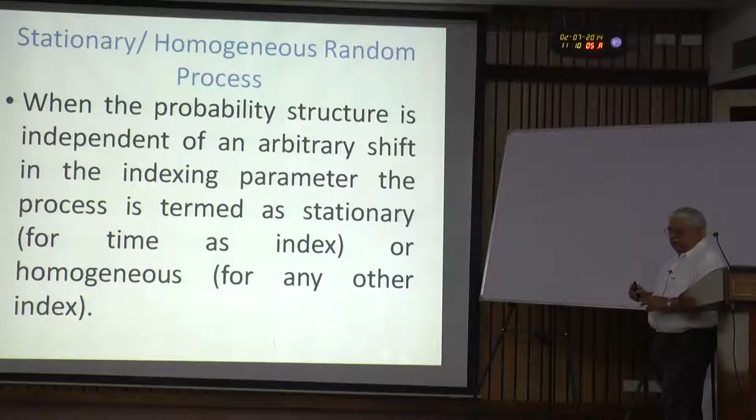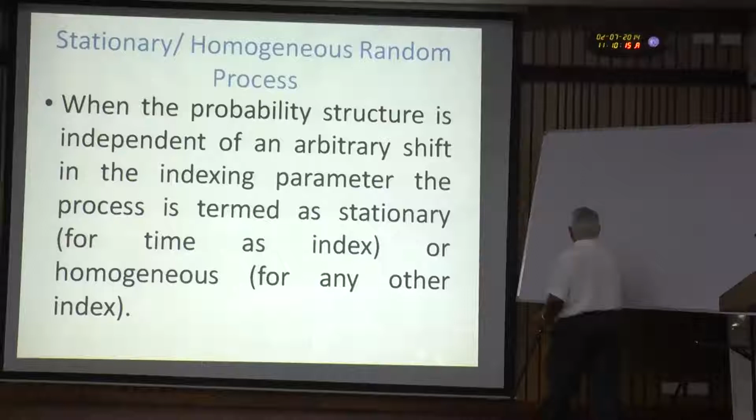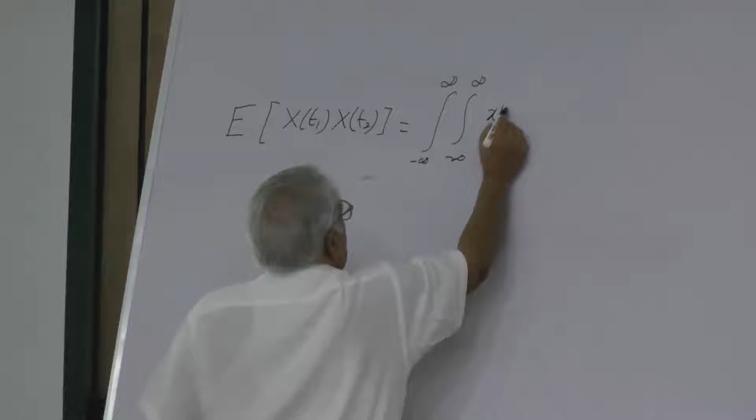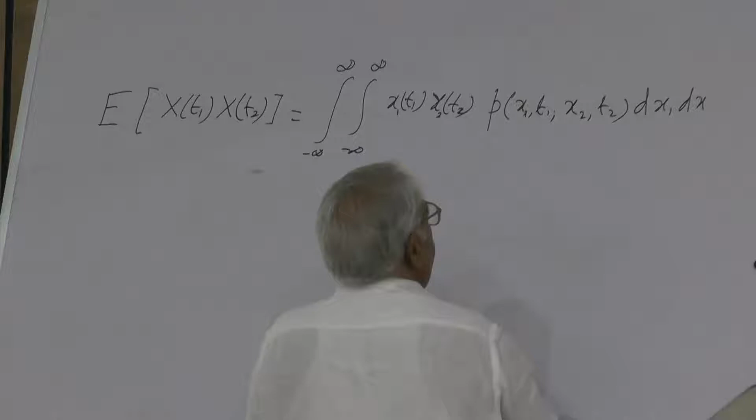I hope it is understood. I will try to explain it further. What we have here, the second moment, the expectation of x at T1 into x at T2. I am not considering the central one. This is defined as a double integral, in general, from minus infinity to plus infinity for both, and then it is x at T1 into small x at T2 into the joint probability density function of x1, T1, x2, T2, dx1 dx2. Okay. This is the general definition.

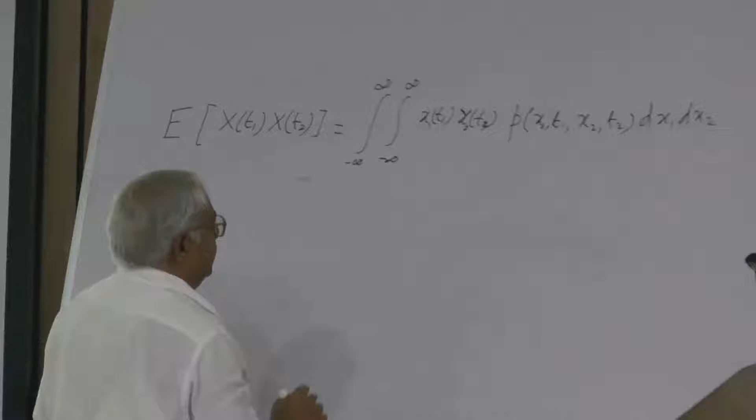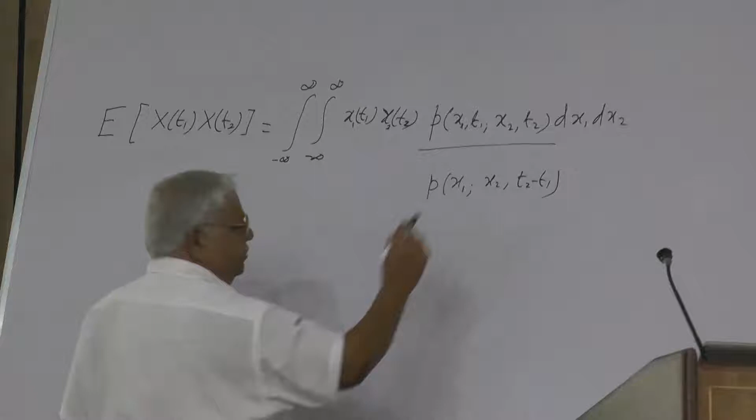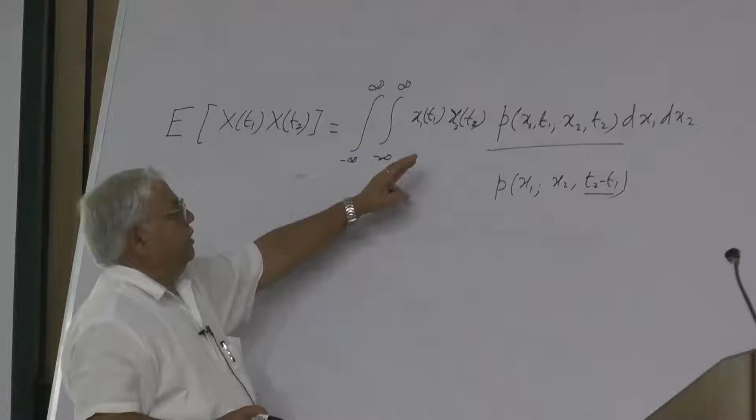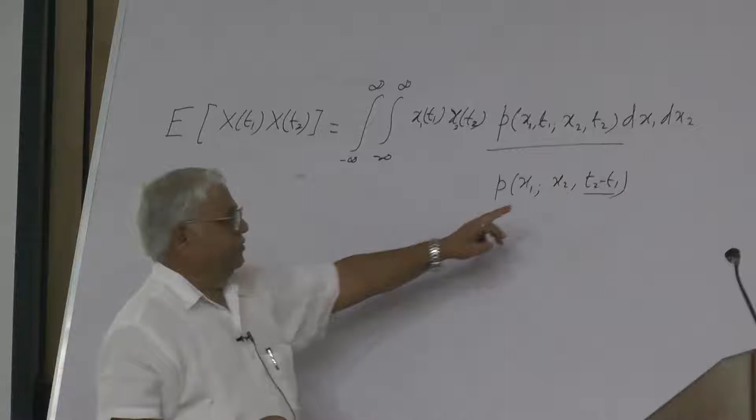This holds for the non-stationary process. But if the process is stationary, in that case this part becomes x1, 0 we need not write, x2, T2 minus T1. So, this is for the stationary process. So, when you integrate this, the second moment for the non-stationary process is a function of T1 and T2 both. For the stationary process, it is a function of this difference only. x1 and x2 are integrated out. When you substitute the limits, x1 and x2 do not come out of the integral. It is only the time part that comes out of the integral. And so, for the stationary process, this expectation is a function of the time difference. So, this difference is there between the stationary process and the non-stationary process. This makes the mathematics slightly simpler.

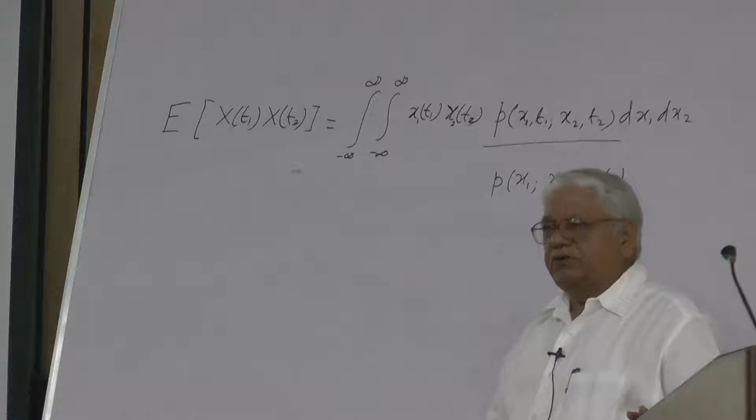So, most of the times when you make the first model for any random process in analysis, we start with this as a stationary process. And then while we examine, if we find that it is not stationary, then we go over to the non-homogeneous or non-stationary process. So, as I said, the property introduces some simplification. Now, in all vibration problems, the frequency is very important. So, we talk of the spectral properties, which are the frequency properties of the process. For this, we define a spectral density function. For the non-homogeneous process, we call this the generalized power spectral density function.

This term has come from electrical engineering. They were the ones who first defined it. So, for this power spectral density function, there is a proper theory of how it is defined and why it is like this, but we do not have time to discuss it here. This phi xx subscript omega 1 omega 2 indicates that it is the density function of the random process x. There are two of these, so this is a bivariate definition. And this hat indicates the difference between the generalized power spectral density function and what we call the PSD function here, short form, or the simple PSD function.

So, this is defined as a function of two frequency arguments, omega 1 and omega 2, as the double Fourier transform of the covariance function of x. This is the covariance function. Remember that this is a central moment. Okay. And then this has the argument, there is an i missing here, e to the power i times omega 2 T2 minus omega 1 T1. This i is missing in the typing, and integrated over time.

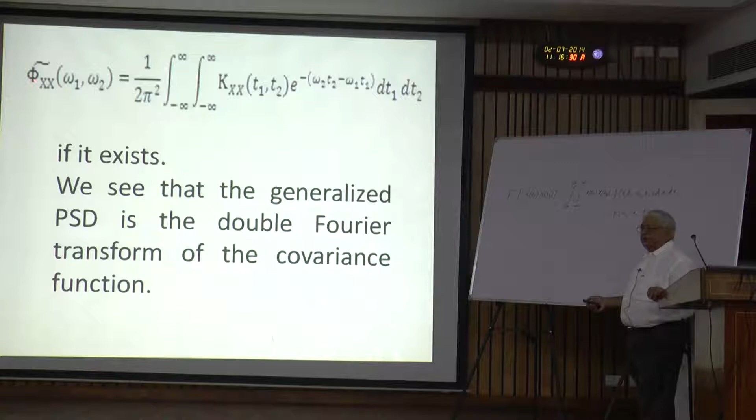Of course, this definition is valid only when this integral is bounded. For many problems, this integral may not be bounded. So, you may have the covariance function, but you may not have the PSD function. So, this is the generalized power spectral density function, and the information is equivalent. If you know the covariance function, we can find the PSD expecting that it is bounded. If the PSD is known, by taking the inverse Fourier transform, we can find the covariance function.

Now, for the stationary or the homogeneous process, this definition is simplified, as there is only one time, that T2 minus T1. So, we indicate this by tau. This is the lag period or the time difference between the two x's. This we call as the lag period. And you can see that this is the single Fourier transform, that I is existing here in the other expression that I was missing. So, this is 1 by 2 pi integral minus infinity to plus infinity covariance of the stationary process x e to the power I omega tau d tau.

And by inversion, the covariance can be written in terms of the power spectral density function. This is the simple power spectral density function, no hat put here. So, many a times when we are solving a problem and for the excitation or the input, only the information up to the second moment is available, we find the response covariance either for stationary or non-stationary, and then to get the frequency breakup, we go to the power spectral density function, either the generalized one or the simple one.

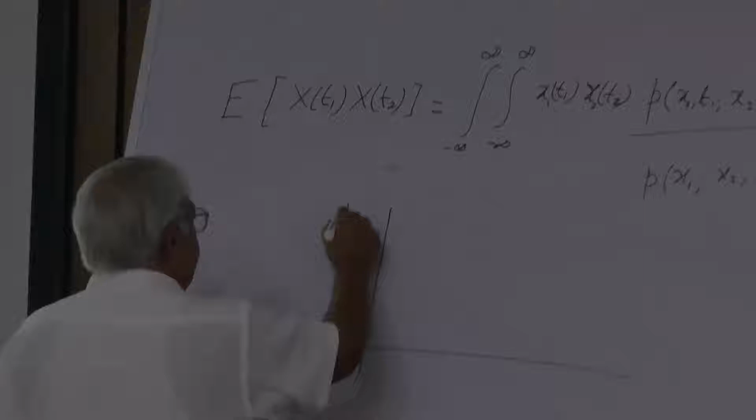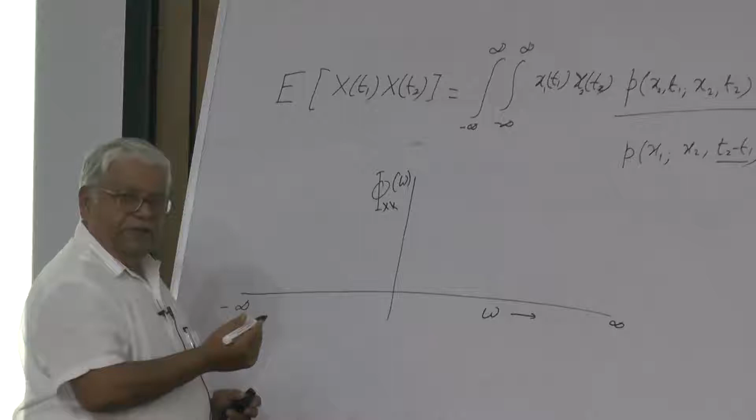We are plotting over omega here from minus infinity to plus infinity. Actually, negative frequency has no meaning physically. Frequency is always positive, but we still consider this as negative mathematically. And if the PSD function is flat like this, say phi naught, a constant value, this is known as a white noise. Mathematically, it is simple to handle. It is constant, not a function of omega, so integration and differentiation are easy.

There are other types of standard processes classified according to the power spectral density function. Like this is something very common. This constant white noise process is not a real process. Actually, this line that I had drawn, it can be shown that the area below this, between the x axis and this line, indicates the energy content in the system.

As I said, there is an argument why we have this definition of the PSD function. So, this indicates the energy content of the system, and a white noise starting from minus infinity to plus infinity will have infinite energy. So, theoretically it is easy to handle, but practically it is not a real process. There are many real processes like this. It would start at some omega naught and finish at some value symmetrically. This is known as a bounded white noise.

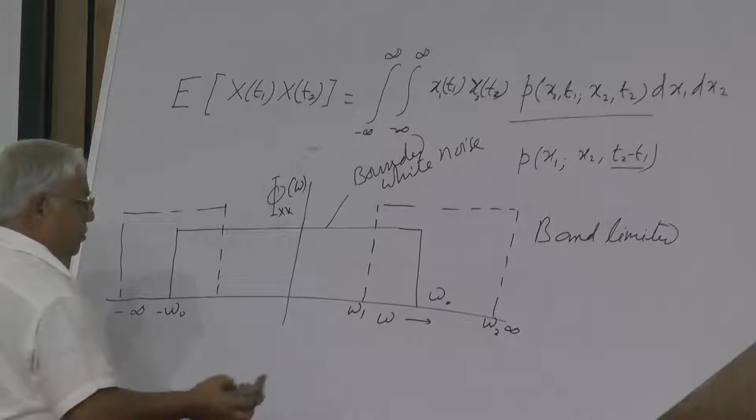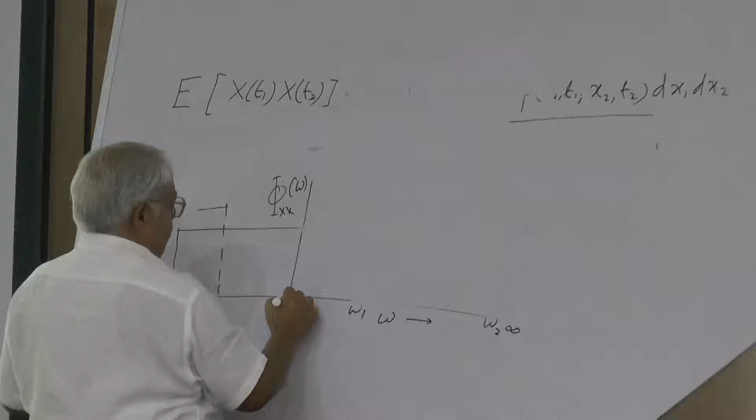I will give you one example of a real power spectral density function. The unevenness of the track, the landing track, the airstrip or the road has a form like this. It does not start from 0, somewhere here. It goes like this. This is a type of PSD function that we have for a road.

Zero frequency — this frequency now is not the time frequency. When you are using the road, it is spatial frequency, radians per unit meter or per feet in terms of space, not in terms of time. Normally, frequency we say is radian per second, but spatial frequency would be in terms of the distance. So, it goes like this. Here,

zero frequency means what? If you have a system with zero frequency, it means there is no oscillation, it is perfectly flat. In terms of the road or the track, it is perfectly flat. And what this indicates is, suppose we have the road here, this is the mean level and this is the road to some exaggerated sense. It may not have a flat mean, it may have a variable mean, it may have undulations like this in the mean. Over that you have the unevenness scattered. So, all those things are possible.

So, basically zero frequency does not exist on the road. So, it is 0 here, and again to simplify the problem for analysis, we make it like this. We will let it extend and cut somewhere here, and this is the type of profile it has. We can say that as far as the analysis of a vehicle running on the road and its vibration is concerned, if the frequency is in this band, then it is important. If the vehicle frequency is beyond this band, then the road unevenness will not affect it. It will affect only in this range. Beyond this range, there is no interest, the oscillations would not be coming into picture.

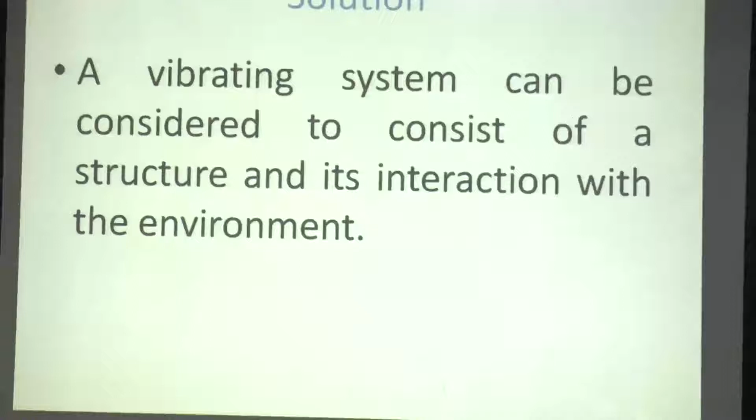This was just some idea about how we can characterize and understand the behavior of a random process looking at its PSD function. Now, after talking about the random variable, random process and its description, I wanted to show how we can use this for some problem solution. So, there are two approaches used here. This is about the modeling of the system. Basically, there are two components in the vibrating system, the structure and the environment with which it interacts.

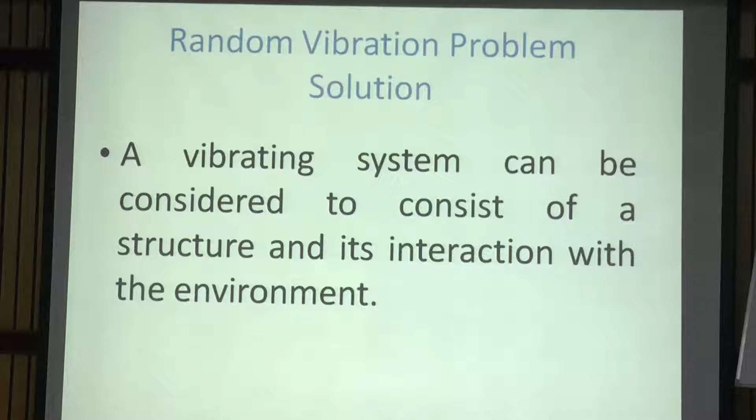So, we model the structure depending on the need, the type of analysis that we want. This is not only for random vibration problems, this is for all vibration problems. We model it either as a discrete set of masses, so you have the discrete or lumped mass systems, 1 mass, 2 masses, 3 masses, 4 masses, like that. We can continue to increase the masses, or we can model it as a continuous system, depending on what is our interest. If you are only interested in the behavior of some point, how much deflection comes at that point, how much stress gets developed at some critical point in the problem, then we can model this as a lumped mass. If you are interested in the complete global behavior, then we model it as a continuous system.

So, we model the structure and we model the environment, both of these. The structure we model to have a mass, some stiffness linking the different masses, or even for the continuous structure, and to have some damping property, dissipative property. Stiffness and damping can be linear or nonlinear. The environment interaction gives us the excitation to the system. So, again, depending on the model that we have made, if there is a single mass, there is excitation at that particular mass only. If there is more than one mass, then all of the masses may be excited, or some masses may be excited and others may not.

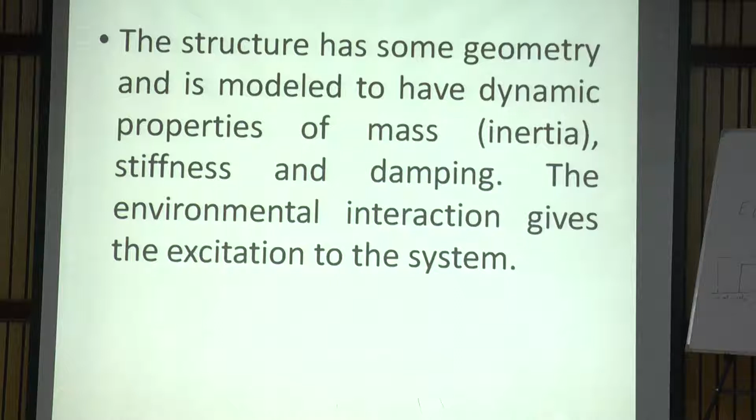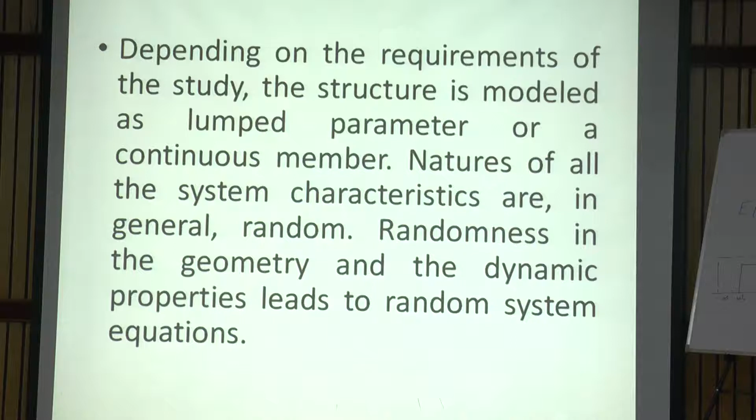In general, all these parameters that we are looking at, the mass, the stiffness, the damping and the excitation, are random in nature. They cannot be defined completely with deterministic quantities. So, if you want a very accurate study, you define all of these as random, and we expect that the characteristics in the probabilistic sense are available to us, either the density function or in some cases the moments. Normal real structures are very complex, so we simplify the model to have an easy mathematical analysis.

Usually, if you have the system also random, that is the mass, stiffness and damping also random, then the system equation is a random equation. If you ignore the randomness in the system, which we cannot do in all cases, as a start, we would like to consider the system to be not random initially. So, we will say that the mass, stiffness, damping are completely deterministic, given to us with full information. So, the first study is started with the excitation as random. This is the simplest one to solve.

So, here I have taken one example of a single degree of freedom system, with mass, damping and stiffness. As I had mentioned earlier, normally when we consider something to be random, we use a capital letter, and if it is deterministic, we use a small letter. So, I have used capital X here to indicate that the response is random. The excitation is considered as random. In this particular example, M, C and K are not considered as random. To a long distance, the solution approach is the same; we will see as we proceed further. It is only later on that the solution approach changes.

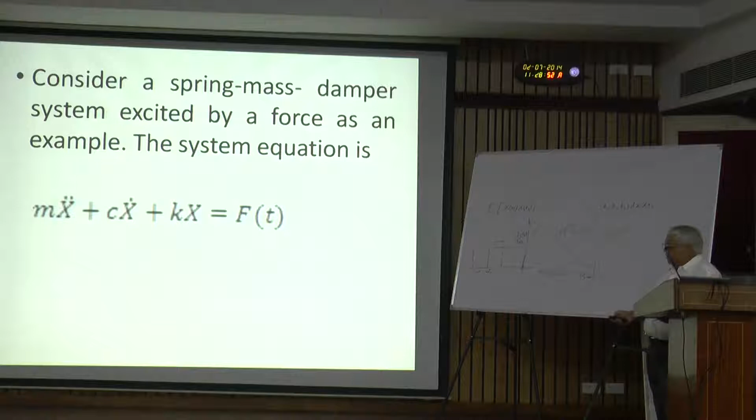So, in this example, we are considering F to be random. As F is random, the response is dependent on F. So, if F is random, X is also random. It has to be. That's why it is made as capital here. So now there are two solution approaches. I am describing here the first one.

Here only f(t) is assumed to be random. The system equation can be expressed. This is another way of writing a single degree of freedom system; it can be done for higher order systems also. The whole equation is divided by m, the mass. So we can say that we have a system with unit mass, or whatever mass it has, in our measurement we take that as unit.

Okay. So this 2 xi omega n is c by m. Omega n square is k by m. This omega n square you know. This is the natural frequency of the undamped system. The same omega n comes here, and this xi is known as the damping ratio, or sometimes the damping factor. Okay. So c by m can be shown to be 2 xi omega n.

I am not doing it. I expected that Professor Wahi will do it.

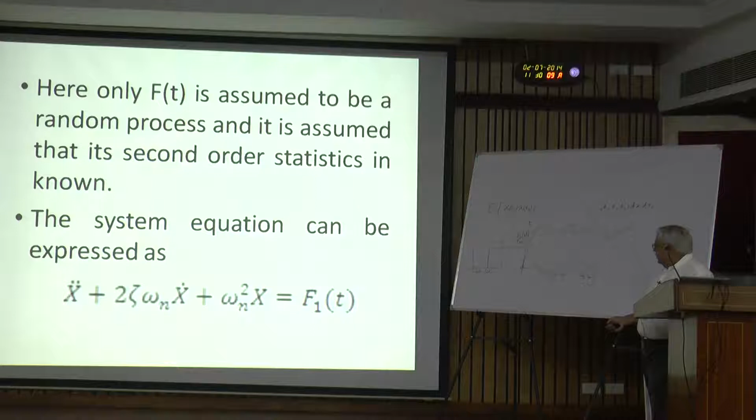Anyway, so this is another form. Here this f1 is f divided by m. I have indicated here, omega n square is k by m. This xi is c by cc, where cc is the critical damping, and f1 is f by m. The general solution can be put in two parts: the complementary function part and the particular integral part.

Remember, yesterday when Pankaj was talking about this, he had put the form like this: e to the power minus xi omega n t multiplied by a sin omega d t plus b cos omega d t. So this a and b we can break up. You remember that form. There were two constants involved. Here also there are two constants involved, A and phi, so that a and b can be expressed in terms of A and phi. So this is a more compact form, easier to handle. Also you can perceive what is happening here.

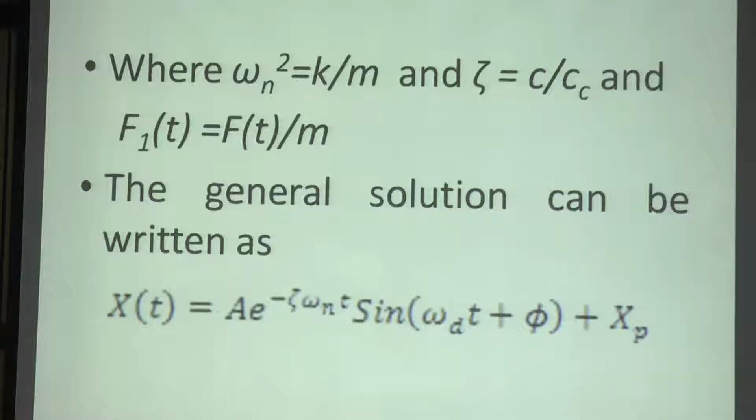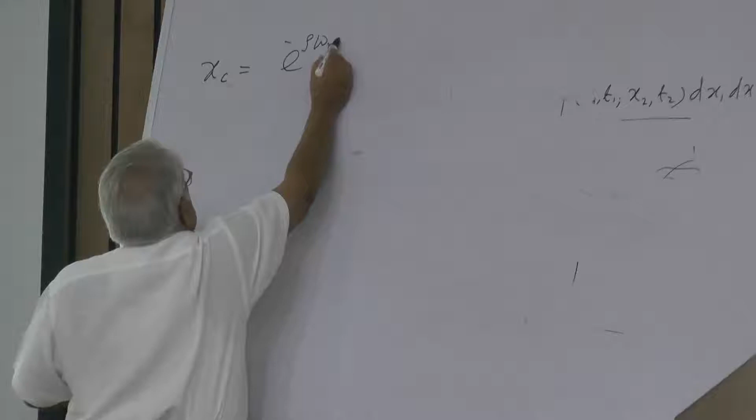Should I do the breakup? Okay, let me do the breakup. Where you had left yesterday was something like this. The complementary function x_c is e to the power minus xi omega n t multiplied by a sin omega d t plus b cos omega d t. He didn't use xi, he had omega d here. Here I have used A there also, so I will use something else.

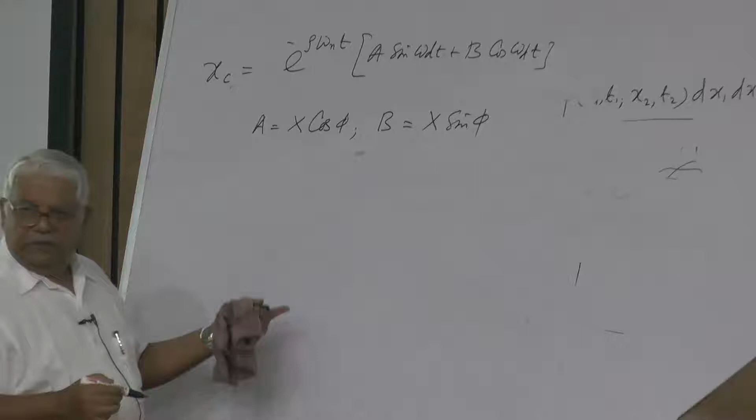What we do is, we write this a as, say, X cos phi and b as X sin phi. Can we do this? Yes, we can. A and b are constants, X and phi are constants. If we square and add, a square plus b square is X square. Okay. B by a is tan phi. So using those, we can relate a and b. Now if you substitute here, take X outside, what will we have? So this becomes capital X e to the power minus xi omega n t, sin omega d t cos phi plus cos omega d t sin phi. Can we write this as sin of omega d t plus phi?

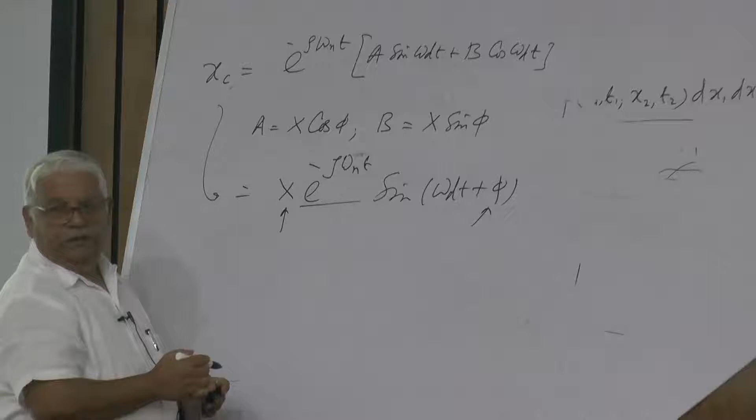So this is what I have indicated here. This is the phase angle. This X, which is written as A there, is the amplitude, and this indicates the envelope. This is how the system is decaying. Okay. This is the way the system decays. Okay, so this is the complementary function part, and then I have left this particular integral as xp.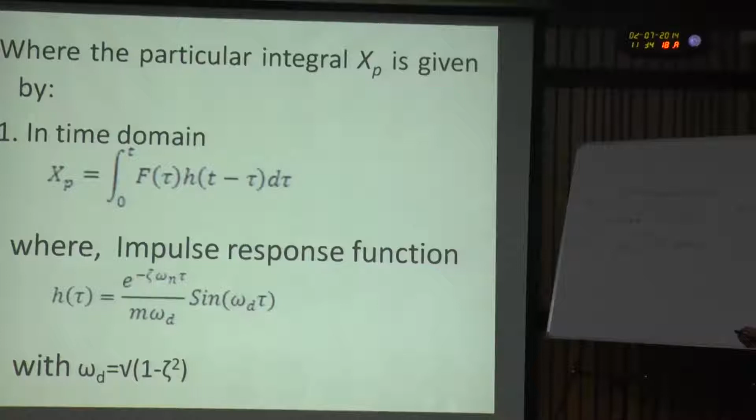The reason is there are two approaches to xp. We are considering, especially for random vibration problems, that the excitation is not going to be periodic, or it's not going to be a harmonic function. It is a general function. So, assuming that f(t) or f1(t) is general, we are using the impulse response function here. In the time domain, this h is known as the impulse response function defined here. h(tau) is e to the power minus zeta omega n tau divided by m omega d, times sin omega d tau. And this integral can be shown to give the particular integral.

Particular integral is any solution. Remember that for the linear single degree of freedom system, or linear second order constant coefficient differential equation, all you need is a solution, because the solution is unique. Whatever you get has to be the solution. The variation due to the initial conditions is taken care of by these constants here, this constant A and this constant phi. So, this is what we call the time domain approach. There is a second approach which we call the frequency domain approach. There this capital H of omega is known as the frequency response function.

And for any general type of input, this is the form that it has, and this integral gives the particular integral. This can again be shown that this will satisfy the system differential equation. So, depending on which one we are going to use, that x p that I had left there can be put there.

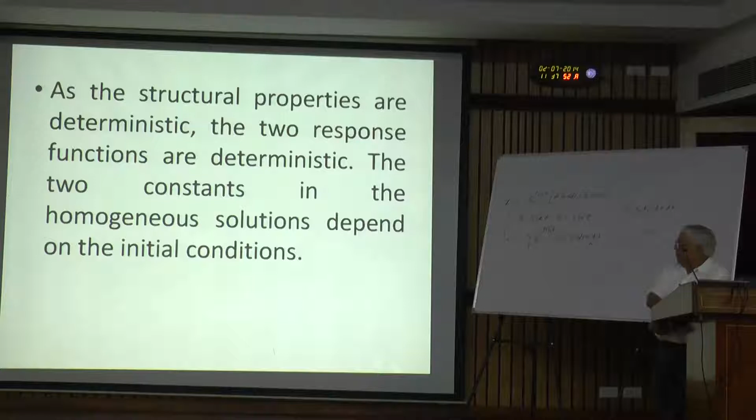For this example problem, we are assuming that A and phi are deterministic. So, we are not taking the most difficult case, the simplest case we are trying. So, in the time domain, this is the solution, the complementary function part and the particular integral. Now, we are assuming here that for this excitation, we have the knowledge of the first two moments, the mean and the correlation or the covariance is given to us.

So, we expect that the probability density function is not given. If it is given, then using this expression, we can find the probability density function of x. It is possible. It is complex, but can be done. If it is not given, then we have to make do with the moments. So, we take the moment of this x of t. So, we find the mean of x. So, that is the expectation of x of t.

Remember that this expectation is an operator, and when you take it over the deterministic quantity, it remains as it is. The probability density of a deterministic quantity is 1. Okay, it does not change. So, this part we are assuming as deterministic, it will stay as it is. If we had considered the initial conditions as random, then we need some information about A and phi, and then we would write an expression like this here. Okay. So, this remains as it is.

Now, the second part here, this expectation is taken before the integral sign. Now, knowing that the expectation and integration are both linear operators, we interchange the order. So, we take this integral outside and take the expectation inside. Here, this part is deterministic as it contains the system parameters. This one is random. So, only the mean of this is taken, which is written as mu of f tau. Okay. Mu of f tau h t minus tau d tau.

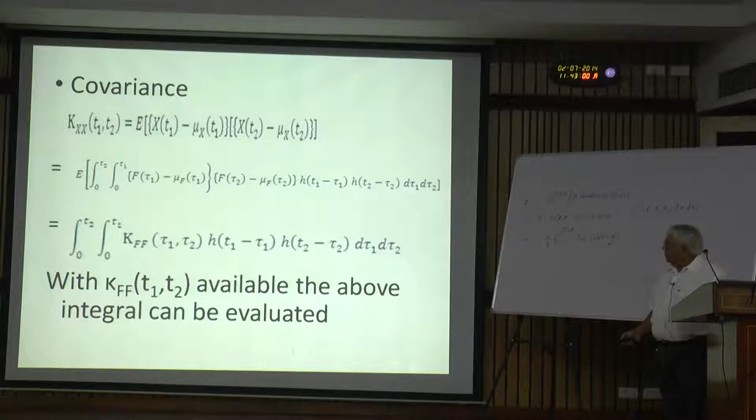Again, when this expression is known, we can do the integration. If it is difficult, then we do it numerically. Otherwise, we do it in the closed form. So, this is the time domain approach. We do exactly the same thing in the frequency domain approach. Only difference is that this part of the integral is in the frequency. Here it is not integrated over time, but integrated over frequency. So, exactly the same thing. This one has to be replaced.

By the way, this f1 bar indicates the Fourier transform of f1. So, first that has to be obtained. Normally what would be given is the mean of f1 or the covariance of f1. So, from the mean and covariance of f1, we have to find the mean and the covariance of f1 bar. Okay. So, this is the expression for the frequency domain in the mean, and this is the one in the second moment, the covariance.

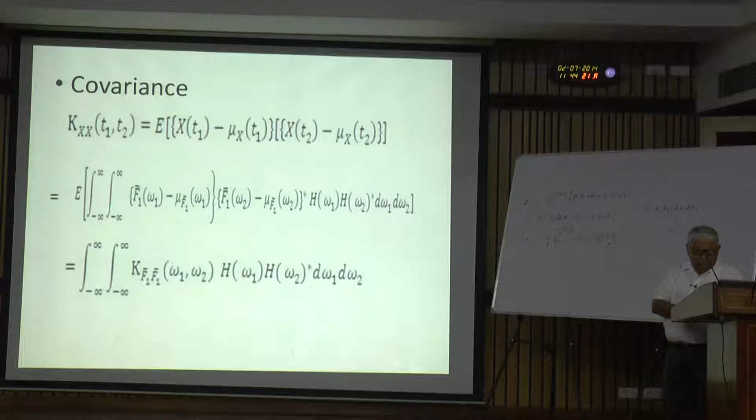Exactly the way we had done earlier, writing this term, then taking the expectation inside. So, this becomes the covariance of F1 bar at omega 1 and omega 2. Okay. So, this is the first approach. The second approach is, I could not make the proper transparency for that. I will just explain from here. You see here,

in the first approach, what we did was, we solved this differential equation, found the expression for the solution of x, and then by taking the different expectations, we found the mean and the covariance of x. Now, it is possible that we take the expectation here itself. If you take the expectation here itself, so I take the expectation of this whole equation. So, what will we have?

We will have m into the expectation of x double dot, which is the mean of x double dot, c into expectation of x dot, which is the mean of x dot, and then expectation of, sorry, not k, expectation of x, which is the mean of x. So, this differential equation, which is in terms of x, x dot, x double dot, comes out as mean of x, first derivative of mean of x, second derivative of mean of x. Can you see that?

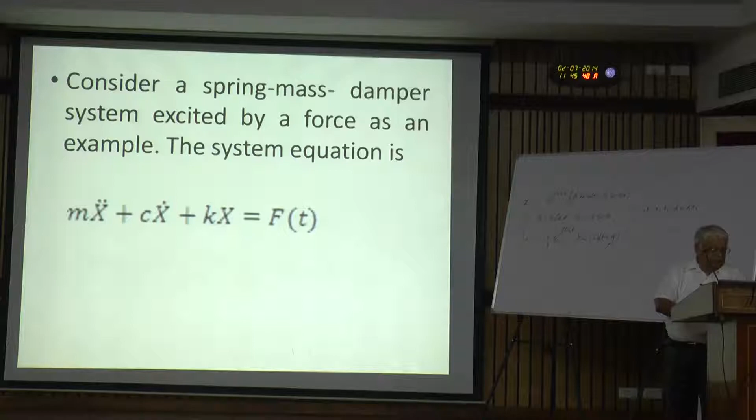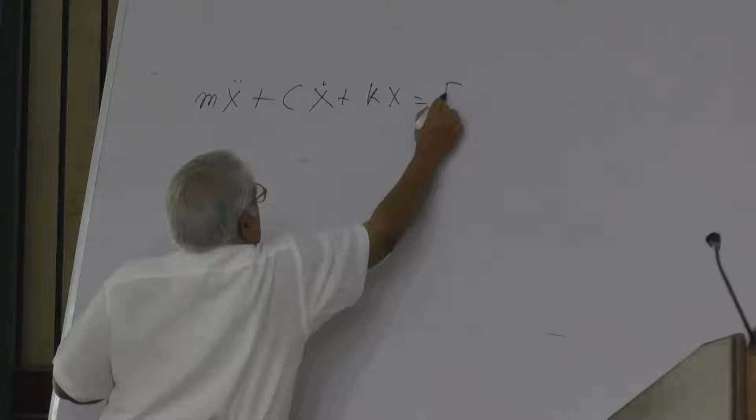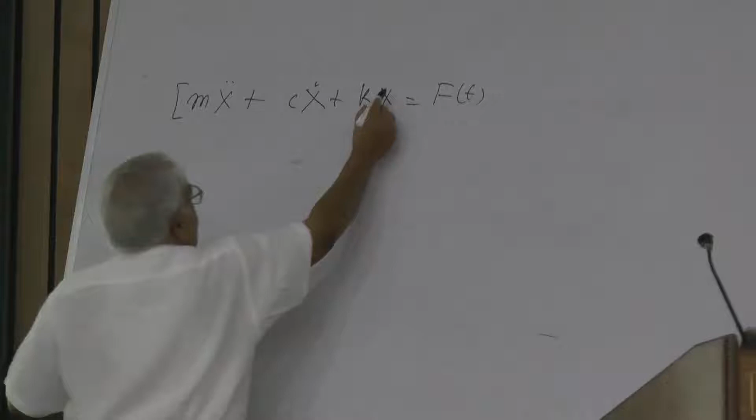Let me write this. We have the equation like this: m x double dot plus c, this is small c, x dot plus k into x equal to f of t. We are assuming that these are deterministic. So, what I do is, I take the expectation of the whole thing. So, term by term we consider here. So, this m is deterministic. So, first term becomes m into expectation of, and I am writing this as the second derivative of x with respect to t

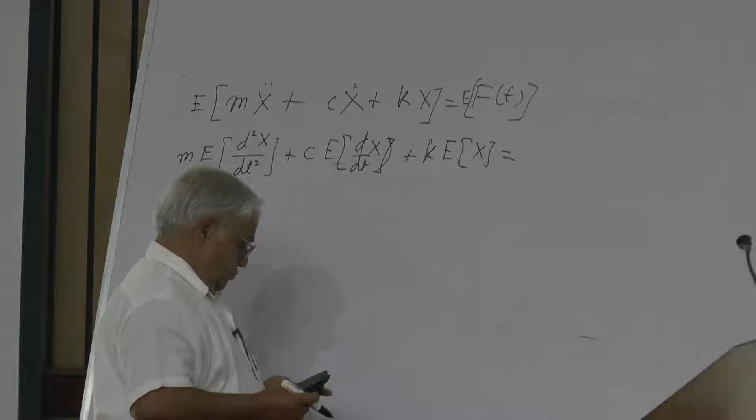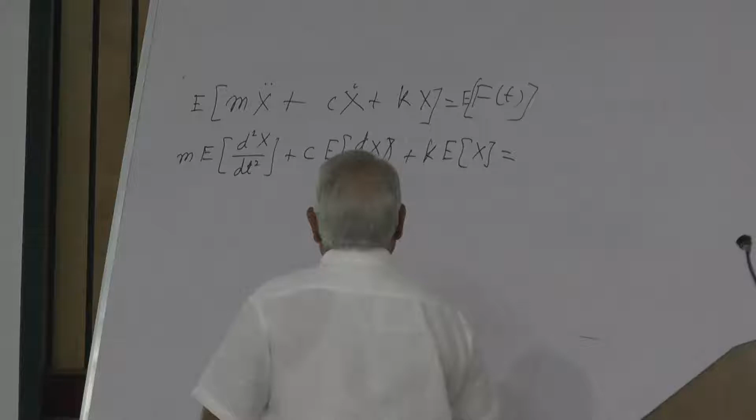plus c expectation of x, okay, plus k expectation of x. Sorry. Okay, so, and this part here. Now, what about this? Can I write this as mu f of t, the mean of f, and this side here, this becomes plus k mu of x.

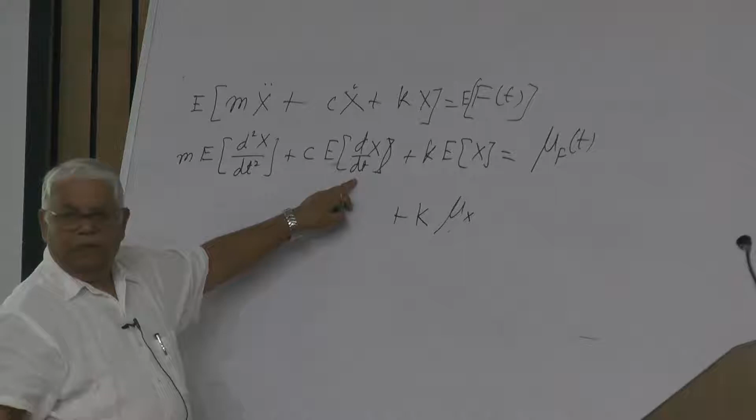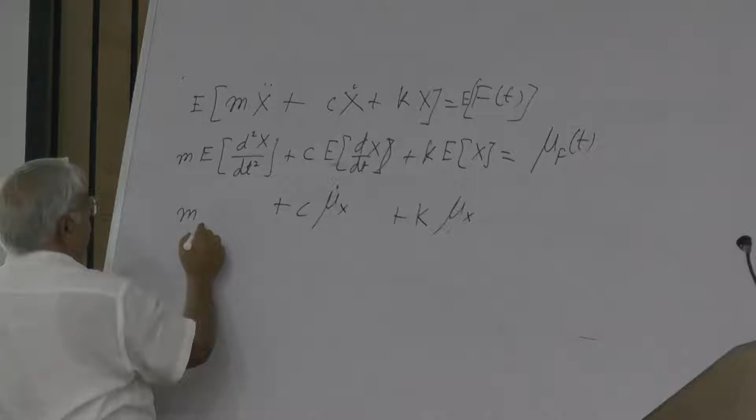Differentiation is a linear operator, expectation is a linear operator, you can interchange the order. So, when you take it inside, it becomes mu of x, and derivative of that is c multiplied by mu of x dot, or, depends how you want to write this, mu dot of x, plus m, same process again, mu x double dot. Okay. So, now instead of this differential equation, we have the differential equation in the mean of x, and this side you have mu of f.

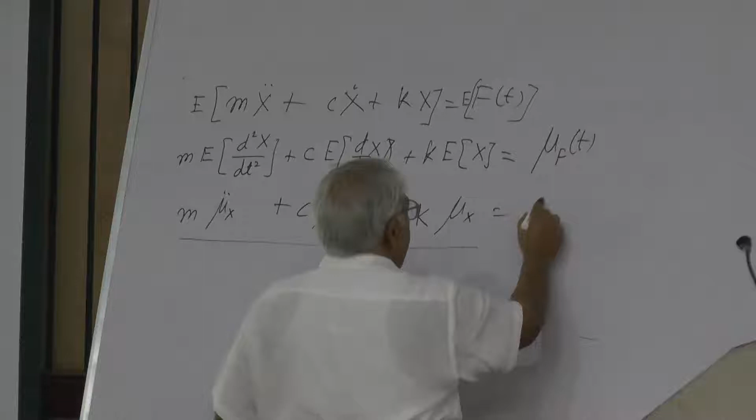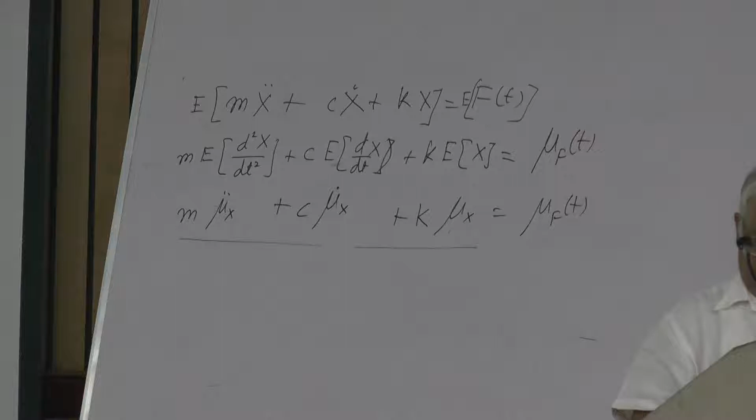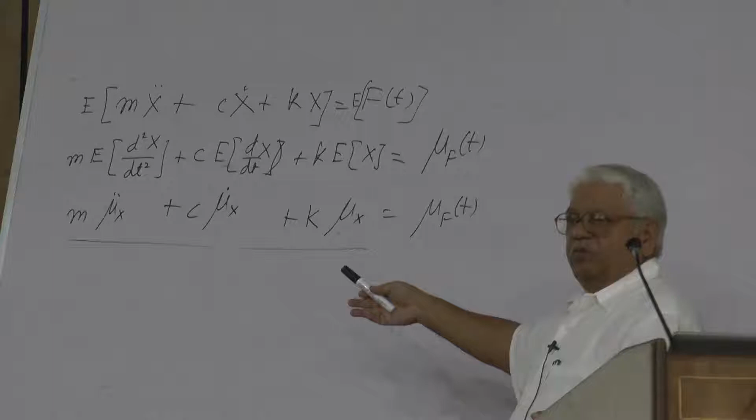So, this is the second approach. Rather than first finding the response, then taking its expectations, you directly solve the differential equation in the moments itself. So, just like we took the first moment, you can take the second moment and even higher ordered moments, we solve the differential equation. Solving becomes slightly difficult.

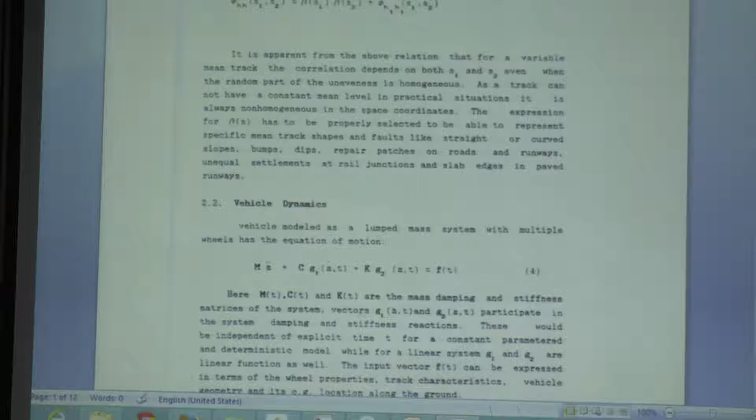The reason is, let me see if I can show that. I had used this approach for a particular example of an aircraft in the takeoff run, and it was a multi-degree freedom system, non-linear system. So, this is the differential equation. This is the system equation. It's a multi-degree freedom system.

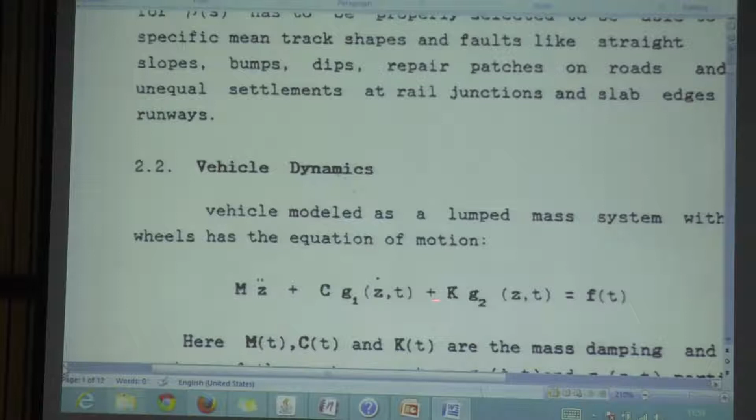So, this M is a matrix, C is a matrix, the mass matrix, the damping matrix, and the stiffness matrix. Z is the response vector. So, Z double dot. G1, a function of Z dot and T, is the non-linear part of the participation in the damping; the damping matrix is kept as linear, but there is a nonlinear function put here that gives the participation of damping. Similarly, G2 is the participation of the stiffness. Okay. So, for this I had used this approach.

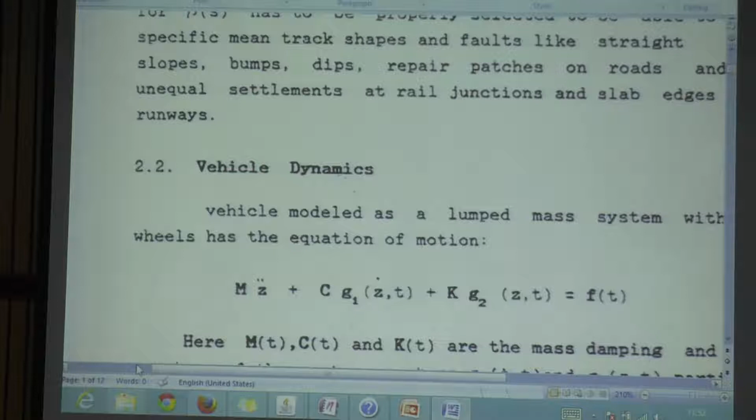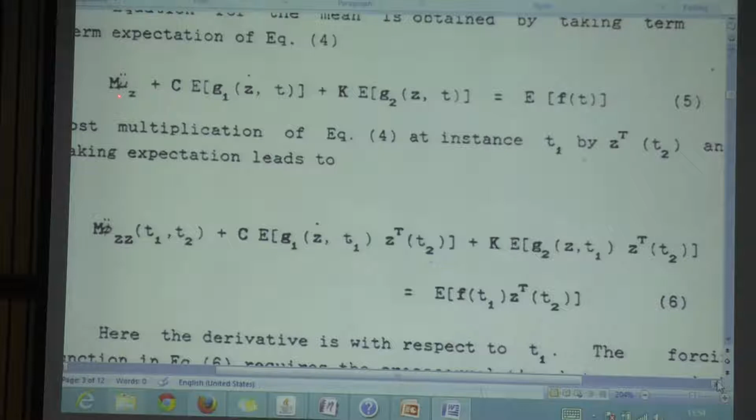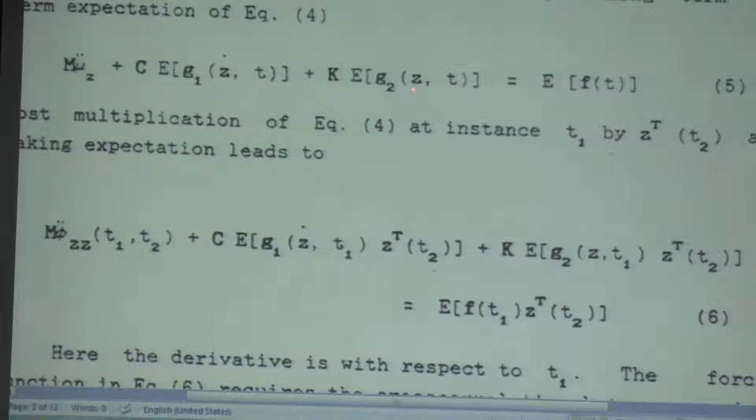I will try to show you the equation in the modified form. These are the two equations for the mean. After the expectation is taken, mu z, and this is the expectation of the nonlinear function. This is a z dot here, the expectation of the other nonlinear function due to the stiffness, and the expectation of f of t. This is for the first moment. If we know the expression of this function, then we can find this expectation.

Similarly here, this is the second moment. In this case, not the covariance, the correlation has been taken. That is, mean has not been subtracted. So, this time you get this equation for the second moment, and then with the properly known initial conditions, these equations can be solved. This being a nonlinear equation, you have to do it numerically.

Suppose it was a linear equation where this was just z dot and this was just z. In that case, we could have done it by hand also. We could have obtained the closed form solution. So, just wanted to show that this is the expression that you get for the second moment, and I will try to go to the solution.

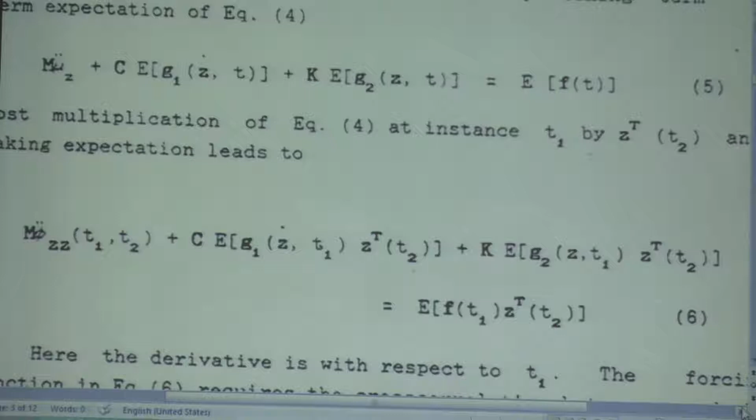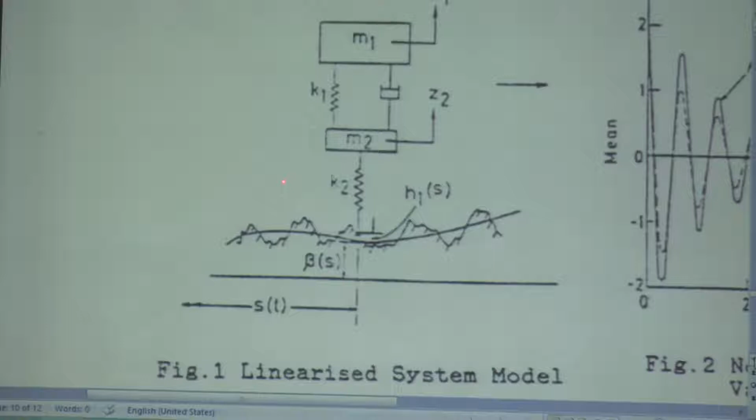The data is taken for a light passenger aircraft. This is the model. A very simple model is made. This is for the aircraft landing gear. This corresponds to the tire. The tire is given a stiffness. Tire has only air, so the damping in the tire is neglected. This M2 is the landing gear mass, the total landing gear mass, and M1 is the share of the mass that comes to that landing gear.

Usually, there are more than one landing gear for an aircraft. So, there are 3 in the tricycle type. So, depending on which one we are analyzing, this will not be the total mass, this will be the share of the mass for that landing gear, and the stiffness and damping. This is a linearized problem here. Z1 is the response of the upper mass, we call that the sprung mass. Z2 for the second mass, that is known as the unsprung mass.

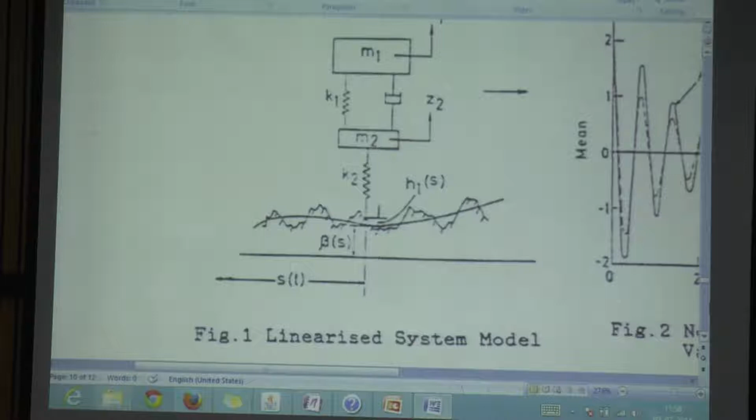Then the runway has a mean unevenness, which is not constant, it is not flat. Then a random superimposed value like this is indicated as h of s. Now, I have the solutions here. There is a slightly modified mean response. This is for the takeoff run, remember.

So, this axis is very expanded. So, when the motion starts, by the way, from the response of the first and the second mass, this mean value of the runway is subtracted, because that also comes in this value. So, actually this will give the oscillations of the masses, and this is the mean value.

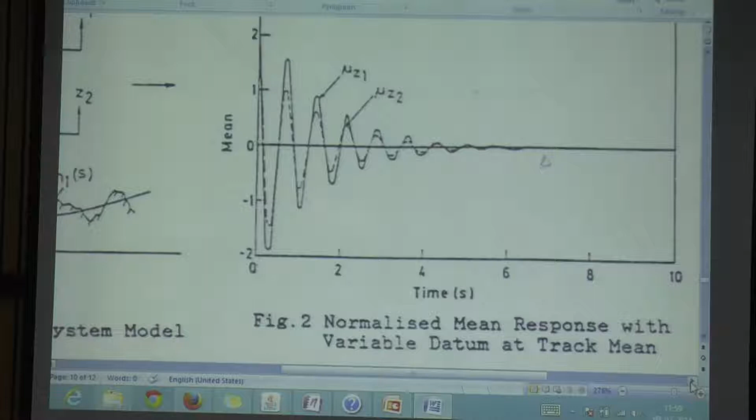When it starts with a shock, it has a large displacement, and gradually as it runs, this drops out. The reason is, as the aircraft runs, the lift increases. As the lift increases, the effective mass reduces, and finally at the takeoff time it becomes 0. So, that is why this is reducing. This is the second moment, the correlation function.

Every time the zoom is changed, it goes to the top.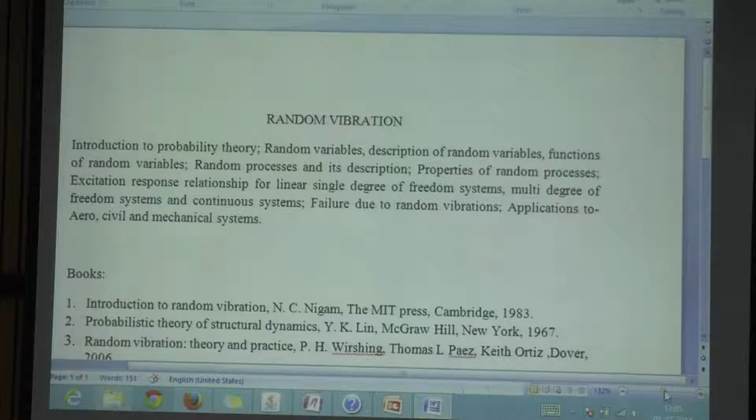There are some books that are very useful, which I have used as textbooks. Introduction to Random Vibrations by N.C. Nigam is slightly old, but it is still the best book in the market. Probabilistic Theory of Structural Dynamics is still older, but gives a lot of information. Then there are some more recent books. Random Vibration in Mechanical Systems by Crandall and Mark; S.H. Crandall wrote the Mechanics of Solids book. This is a book one should start with. It is written for mechanical engineers, and shows where and why you should use random analysis. It is a very thin book.

So, there are actually two types of books in random vibration. One is those I have listed here for engineering applications. They just touch on the probability theory needed for the description, and go more into application to engineering problems. Others, written by mathematicians, delve more into probability theory, theorems, lemmas, their proofs, and just touch on applications. There are almost hundreds of books in this area. You can pick up any of these. This one you can read by yourself; for the others you need some help.